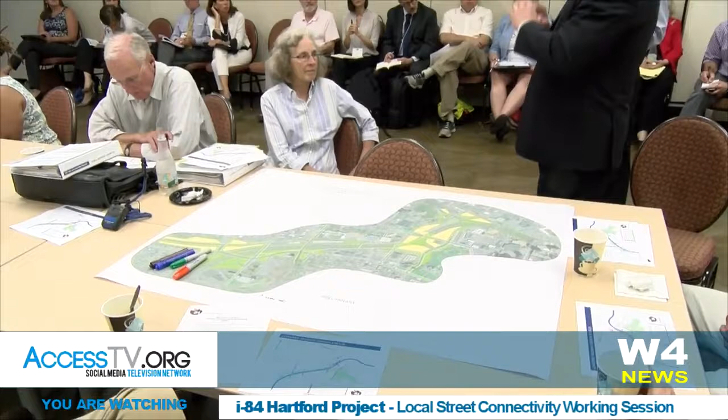This proposal solves a lot of problems in this region, and all of these ideas being developed—I love the concept of moving the railroad station. I love a lot of the decisions going on here, and I'm completely supportive of that.

But as we project out 100 years, and deal with the issues of the city of Hartford specifically—we cannot be in a position, as government, where we have to shut down the city for two years. A city that's currently struggling, in spite of what will be the best efforts on the department's part and everyone's part to coordinate it—there's just no way, in that small area of compression, that the vision we have can go forward without great expense to the city.

So the concept became: what can we do that deals with the I-84 and 91 corridor issue, providing a turnkey operation where we can continue to make sure the viaduct is safe and sound, and continue with the excellent planning for what this might look like, but envision tunnels from Flatbush Avenue to Robert Street, and from the landfill in Hartford down to the South Station in the Meadows, approximately.

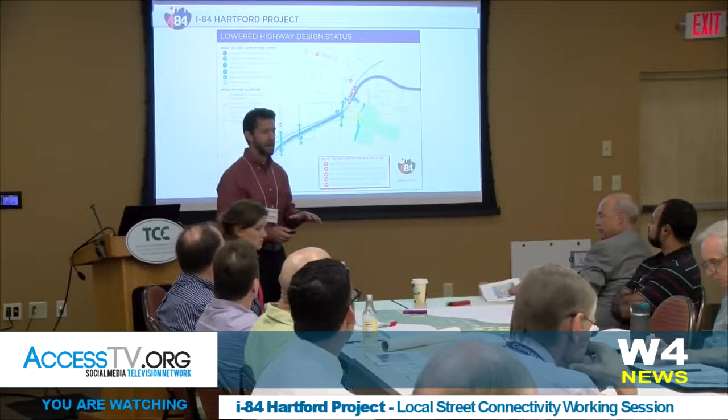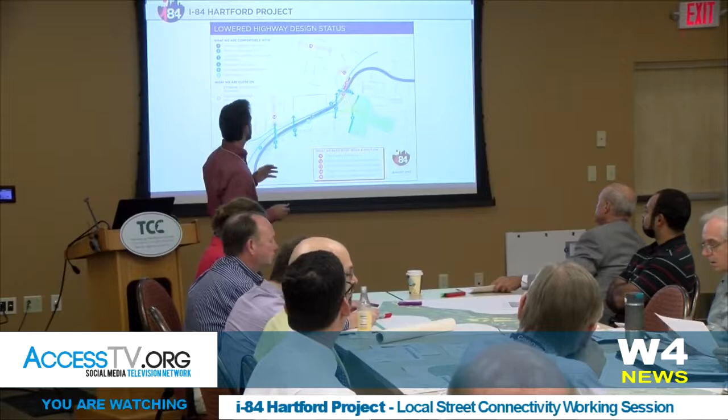So you all should have a handout that we created - thanks to Jamie at the city for recommending we do this. I think this puts a framework to the variety of issues we've uncovered. There are kind of three bins of issues, if you will, very simplified.

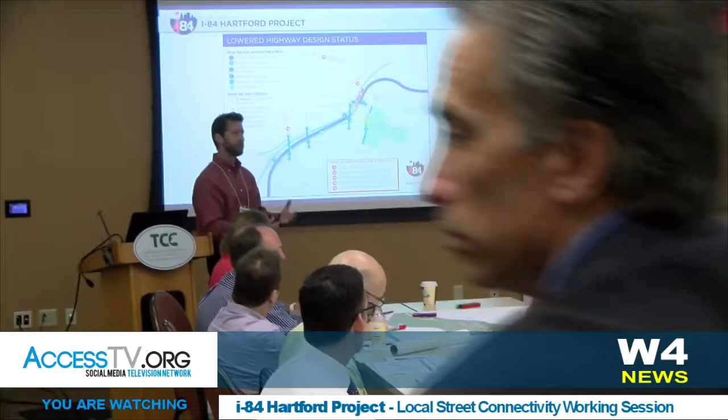There's the things we're really comfortable with, the result of many years of planning - things like we know a lowered highway for this particular project is the solution that performs best. We know the western side of the project, the interchange, we're pretty good with how that's configured and how it works. Local road overpasses, we know the rail relocation is a part of the project that's absolutely needed, and we're solid on that.

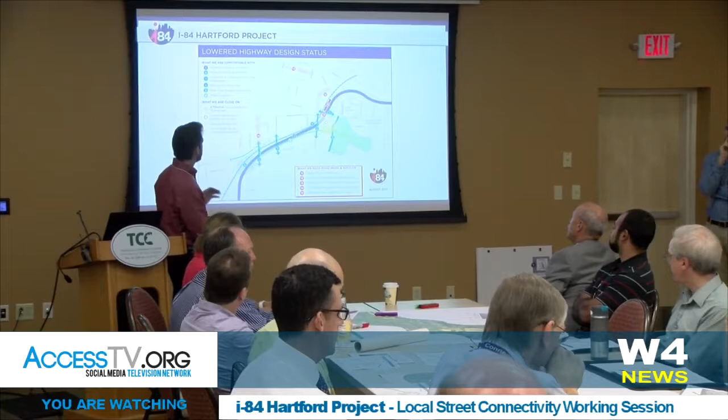There's also a bunch of things we're still working on but feel pretty close on. We know we have to reconfigure and bring CTfastrak into downtown, and we have some working routes for that. The eastern interchange area - we have a number of different concepts, and Casey will share those with you in just a moment.

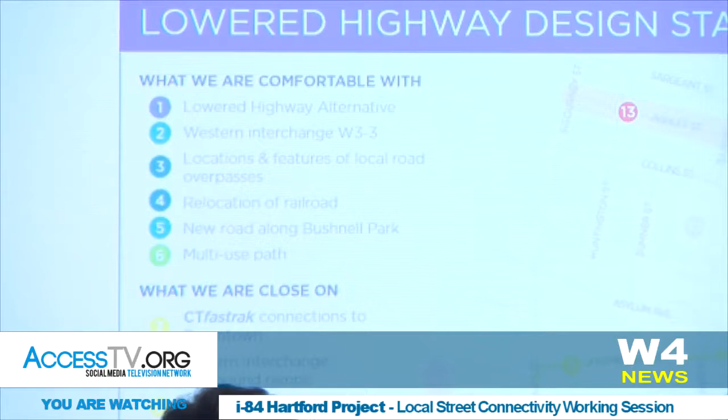We know a deck somewhere in the Asylum Broad area is strongly preferred - it allows for economic development opportunities. And we have pretty good working knowledge of how the local street system should work and operate to enhance walking, bikeability, and transit use. Then there's a whole bunch of things that we're really still stuck on.

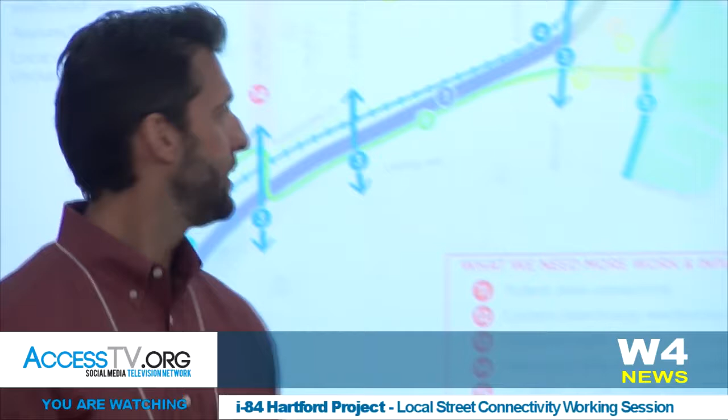These are things where a really strong idea has not emerged yet - things like how do we address the Trident area, or what are the impacts on Ashley Street, or where do the western ramps terminate? These are things still very much in flux, and we still require the assistance of you all in this room to help us think through them.

So again, we might not have touched on everything, but I think this is a simple way to illustrate where we are in the project.

So the first half hour, 45 minutes of this, we want to talk a little bit about the street system before we get into a discussion on the rail station. What we really want to know is what you're interested in hearing about, because we probably can't approach all these topics in one day. There's been a lot of concerns, and we've planned a bunch of new connections, reconfigured streets in downtown and throughout the Hartford area. Is that a primary concern? Did we cut something off that shouldn't have been? Should we add it? Did we add something in the wrong place? Did we move something? That's one theme we might touch on today.

Or are people interested in things like routing? When we take interchanges away, when we move ramps, there's going to be different travel patterns that have to be established. Is there concern over that? Is travel time a big issue? What about traffic? We know Laurel and Ashley Street, we've heard concerns about those. Do we want to spend time on that? How about the overpasses? Did we get them right? Most of them are in the same place they are today, just over the highway, not under. But in terms of how we're designing them with landscaping and bicycle and pedestrian amenities, you can speak to that.

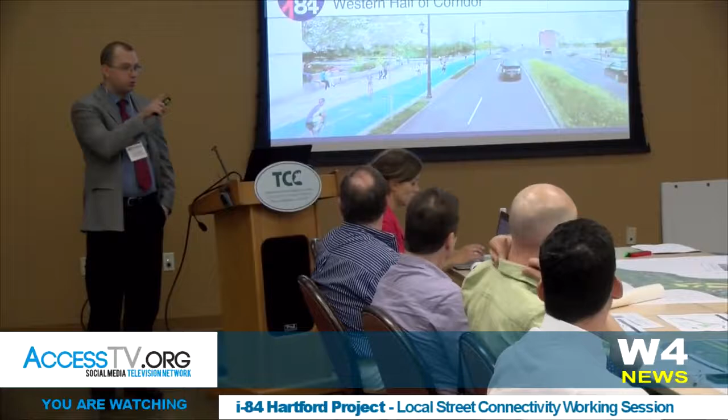Good afternoon everyone, thanks for coming. What I'm going to do is go through the proposed highway layout options that are on the maps in front of everyone at the table, and also on some slides here.

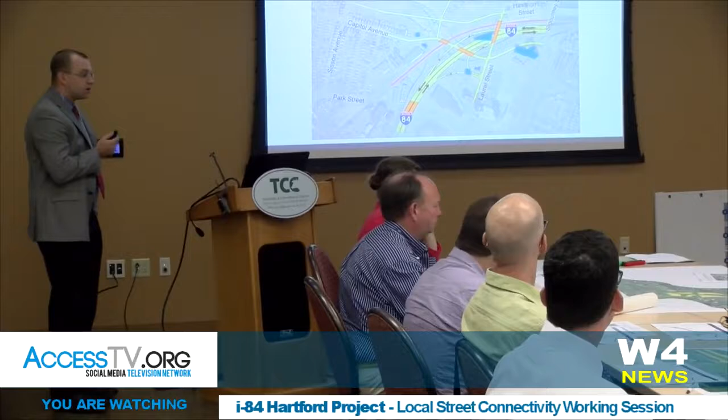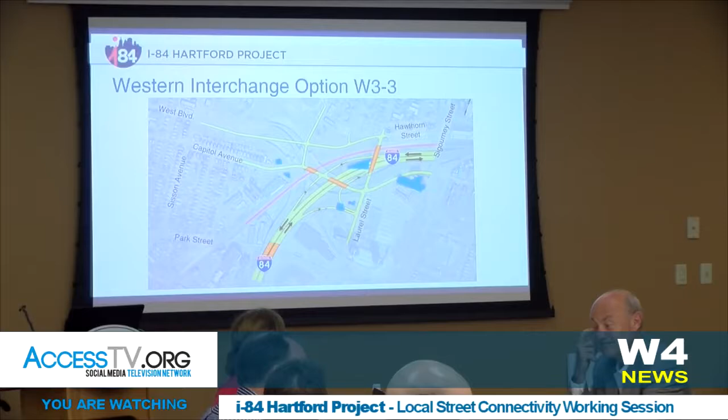Starting in the western half of the corridor, as illustrated on the maps at the table, that western part runs from about Park Street to about Sigourney Street. Proposed I-84 would come over Park Street like it does today. From there it would be lowered down to at or below grade, whereas today it's elevated above Laurel Street and Sigourney Street. It would descend as we go north, reaching about 10 to 15 feet below grade approaching Sigourney Street.

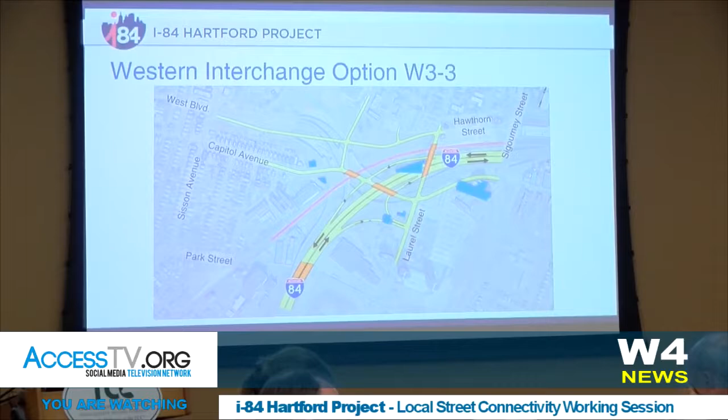In terms of off-ramps, we'd essentially be replacing the existing Sisson Avenue interchange. Today, off-ramps and on-ramps from both directions come all the way over to Sisson Avenue near the west end, taking up a lot of space, as you can see on the aerial with all these on and off ramps. We're trying to replace that with a more consolidated interchange that takes up a lot less real estate.

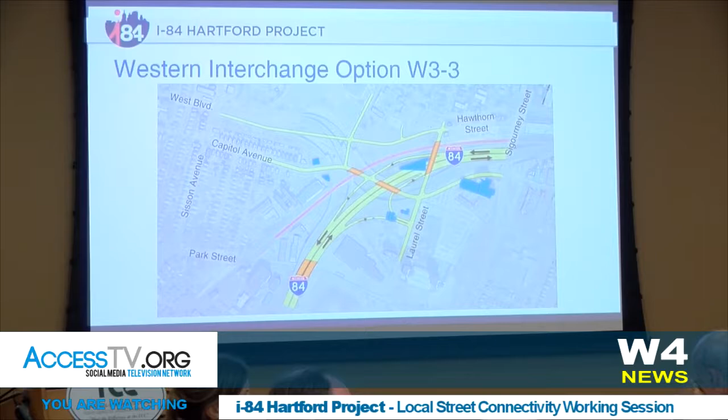So we propose eastbound off-ramps, plus an off-ramp and on-ramp to Laurel Street, just a bit south of the existing intersection with Capitol Avenue. The existing Capitol Avenue comes through here, and Capitol Avenue would be part of the lowered highway. Today Capitol descends beneath the railroad and beneath the highway; it would instead be raised up, climbing just before these two buildings.

On this map, these blue shaded buildings represent potential property impacts. Capitol Avenue would climb over the railroad and over the highway, providing a westbound off-ramp and on-ramp. One of the biggest benefits of consolidating the interchange as proposed would be freeing up this large area of land currently occupied by the freeway ramps.

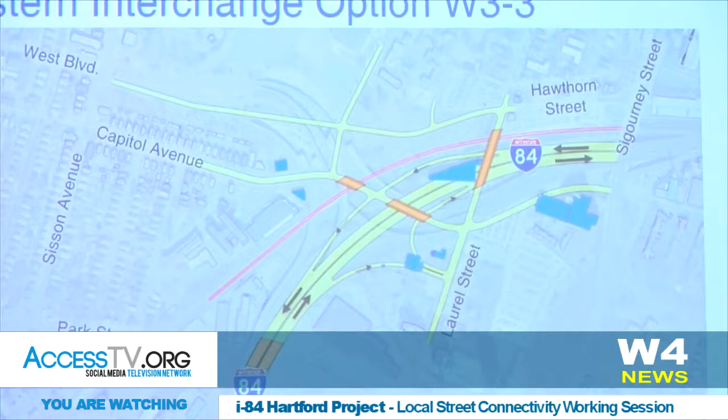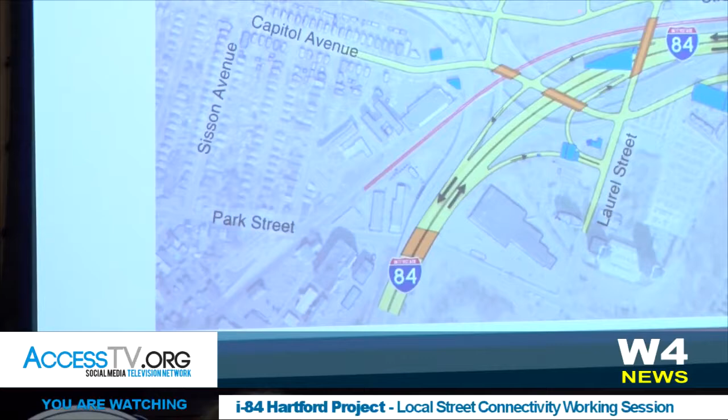In this proposal we recommend a new local street connection starting at West Boulevard at Sisson Avenue, where the current Sisson Avenue ramp is, extending east to connect into Hawthorn Street. This area is at a very preliminary design stage and remains flexible. We've heard some thoughts about the potential desirability of this parcel, which is city-owned, and there's flexibility in how the road could come through and how land could be retained for potential future development.

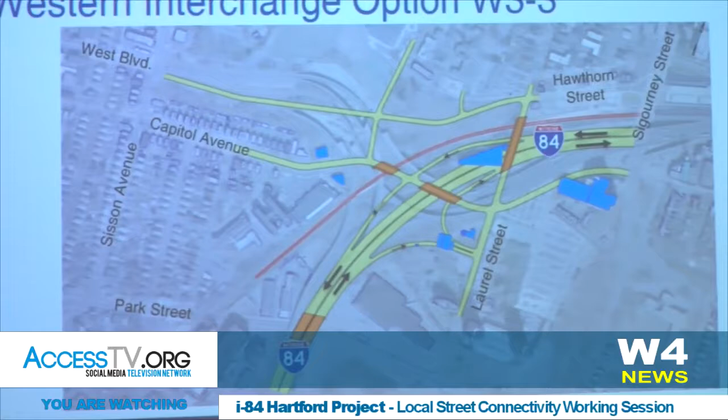With that, if there are any questions, we can pause on the western options here. I know a lot of you have materials in front of you, though some in the back don't have the maps directly in front of them. We also have a 3D digital model up on the monitor if you want to visualize it differently—Nick can manipulate it and go to any location you'd like, or we can move on.

Just a quick question to clarify: the orange segments, is that where the interstate goes underneath the street? Yeah, those are bridge structures—the orange represents bridge structures, while the yellow is at-grade roadway pavement.

And regarding Park Street, is there a reason it starts submerging the interstate after that point rather than before Park Street, to allow continuity along Park Street? Yeah, we looked at that in pretty good detail about a year and a half ago, and in order to get the freeway underneath Park Street back here, there would be quite a few technical challenges associated with that.

One of the challenges comes from the fact that the south branch of the Park River is right next to the freeway in that location, and we're starting to bring the highway down below the water table, which brought some engineering challenges. Not necessarily things we couldn't solve.

It also brings us closer in proximity to, down off the page, where we have the Flatbush Avenue ramps today, which wouldn't be impacted by this project at this point. So how that would all intertwine under a lower condition under Park Street.

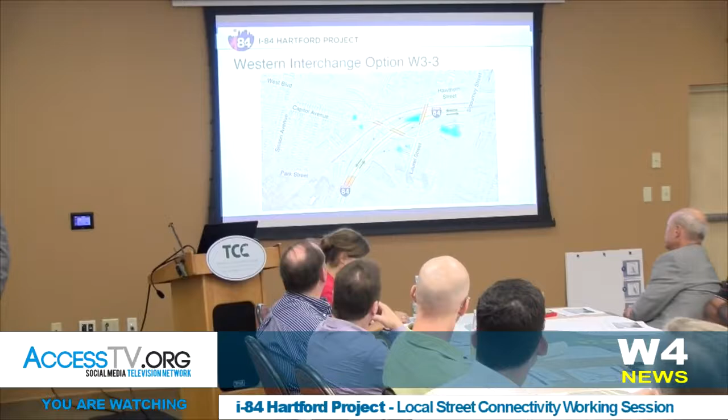The other thing we thought about was the presence of the railroad and CT Fastrak bridges over Park Street, which are there today. Under this project there would be no necessary change to them, and so those would still present that type of barrier regardless of whether the freeway were lowered.

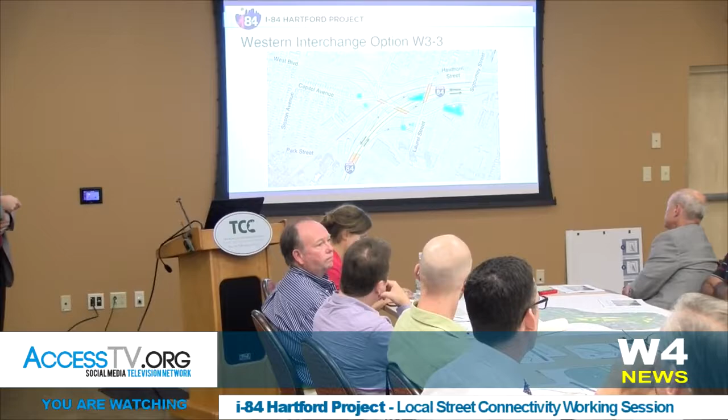Now we have looked at some potential ideas for how Park Street could be better connected underneath I-84. That could include having a bridge with the abutment set back, so there's a lot more space as you walk underneath, and some lighting that could be provided to make it a more attractive place as you move between the two sides of the freeway.

I think this is a pretty good solution on the west side here, and the liberating of 15 acres around the Sisson Avenue ramps is spectacular, and that's a wonderful thing. I think it makes a lot of sense to put a new through street between West Boulevard and Sigourney, extending Hawthorn and West Boulevard to connect.

What happens to the Hartford Courant building there? It looks like it's getting... No, the Hartford Courant building would be kind of over here.

So Broad Street would be over here on this map. You're looking at these ones? Yeah, what is that building? That's the DAS office tower, or it used to be the DAS office tower. So that's been vacated. Okay, I'm sorry.

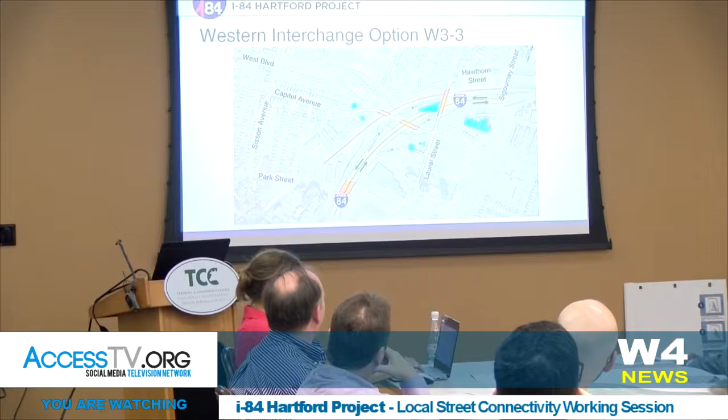Okay, good. So I'm going to move on to talk about, right now we've got three potential interchange configurations on the eastern side of the project. Each of these maps has one of the ones we feel is better performing, but all three of them are potentially still in play.

As noted on the handout that was provided, this is still an area where we think we're moving towards the right solution, but we know we're not there yet, and this is where we really value input. As Tony had brought up, this is where we start to look into the potential station.

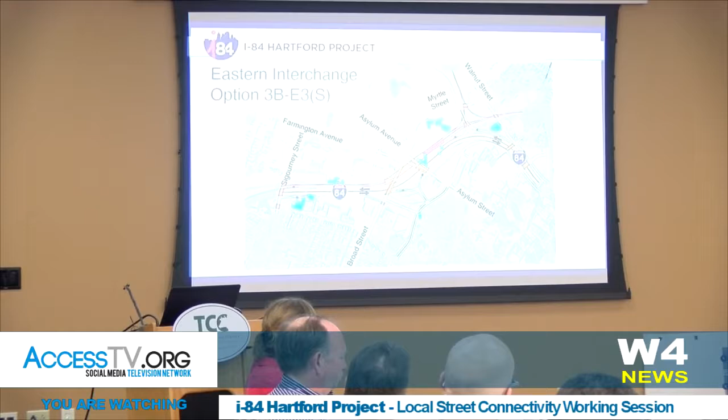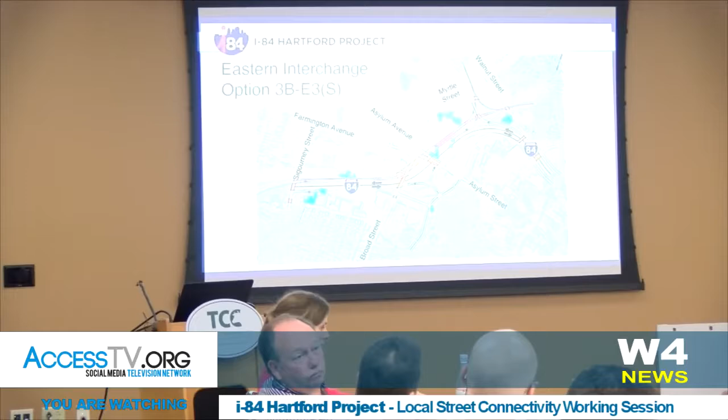The first thing I'll mention on these maps is the proposed railroad relocation. This is where that really comes into play, where it would start. So the existing rail corridor comes from off the page, snakes underneath the highway, crosses at this oblique angle, swings around to Union Station. Union Station's right here, comes underneath I-84 again, and continues off to the north. So again, that's the primary reason I-84 is elevated, these two crossings that exist today, here and up here.

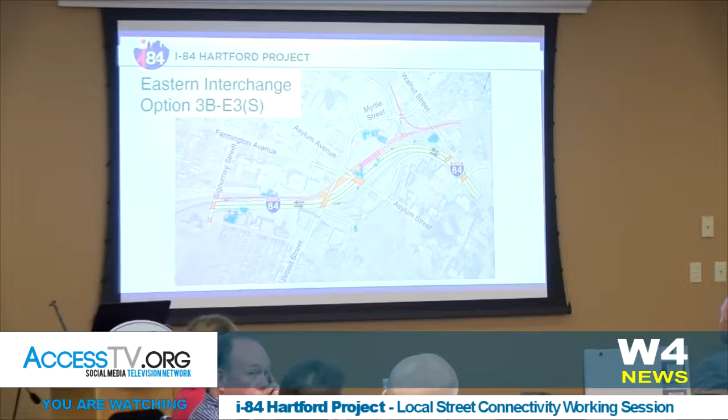So in order to lower the highway to or below grade, we need to move the railroad so it doesn't have to cross twice. These red lines, this red corridor here, represent that railroad relocation. It would go off its existing alignment, approximately here, where this large, recently constructed parking structure that Aetna has is located.

So we would come offline from about here, parallel the highway, come into a tunnel section beneath Broad Street, beneath Farmington, and beneath Asylum. You might be able to tell that it's widened out there, that's where we've first envisioned the potential platforms to access the train. We're going to talk a little bit more about that later.

And then the railroad would match into the proposed alignment here at Walnut Street, and then just before that Albany Main intersection. So once we're able to do that, the highway, which on the western option was lowered to or below grade, about 15 feet below ground where this parking lot is west of Sigourney Street, would be able to remain at or below grade, rising to about ground level through this area.

Today we have the Park River Conduit, a 40-foot by 20-foot concrete box culvert, basically where they buried the Park River as a flood control structure, which comes through this area and curls around like that. So we did speak with the Army Corps of Engineers about the feasibility of potentially relocating that.

It would be a significant challenge, and at this point our proposal would take the freeway and have that climb and sit above that conduit structure. Then, following this area, it would dive back down again to be kind of 10 to 15 feet below where natural ground level is beneath Broad and Asylum, and carry on to connect into that canyon section you have today that goes to about High Street.

In terms of on and off ramps, we would essentially retain the Sisson Street on and off ramps that exist today. In terms of eastbound ramps, we have an off ramp and an on ramp from a new road we proposed, which starts where the Capitol Avenue ramps come today. It would start down there and connect to Asylum Street. This would be located off to the west side of Bushnell Park.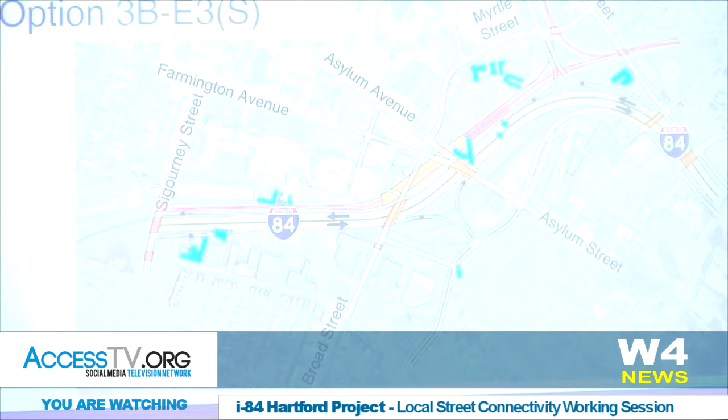So we'd have eastbound ramps come to this new road, and under this proposal we've got westbound ramps that would come to this sort of street extension from Myrtle Street into Edward Street. Now, this area of the project is where we're really still working with stakeholders to understand the right solution. So I'm going to page into the next concept, and you're really going to start to see the difference if you keep your eyes in this top right part of the page.

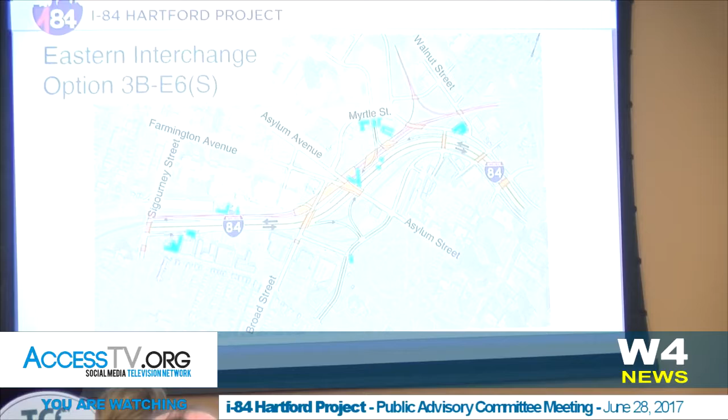Under this concept, which is the one that is on the maps in front of you, Cogswell Street would be realigned into Edward Street here, and on and off ramps in the westbound direction would come to that street. The third option on the table would bring the westbound on and off ramps to the existing Myrtle Street, which would require this potential street to be constructed near the Hartford campus.

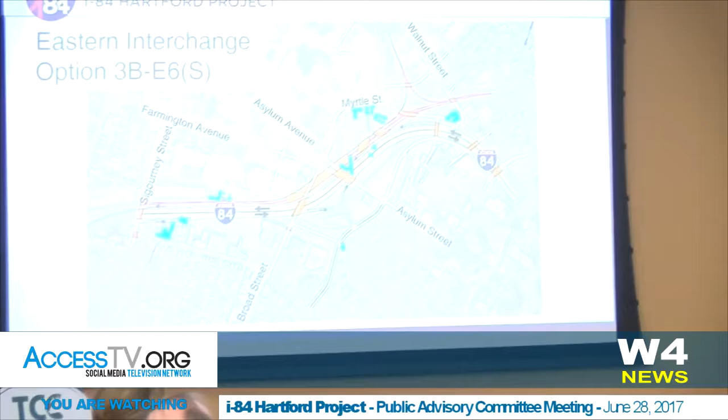So ultimately, we're still trying to weigh some of these different factors, and we don't think we necessarily hit a complete home run with everything yet, which is why we're here today, why we're talking to everyone, and want to understand some of the things you might like about some of these, some of the things you want us to keep working on. So with that, I'll open the floor. There are probably 15 things about this that I could have explained, but in the interest of time, I'd be happy to answer any further questions.

Well, it seems to me, I live on Asylum Street, that the third solution, this solution on the board, seems the most viable, in that the on and off ramp is directed toward Collins Street.

Yeah, so I would want to say one thing about that, is that we are continuing to explore ways to kind of generate that type of movement with this concept. So I see what you're saying - the road is aligned right with Ashley Street, which would direct potentially traffic down there. So we are continuing to investigate ways to almost create an S-type movement there, where the through road would direct you to Collins, because we do understand that Collins Street is the primary vehicular way to St. Francis Hospital, and has been for decades.

Well, the way it is right now, you have in and out from Broad Street and Asylum Avenue and Capitol Avenue, which are major roads. So even though there's traffic, they disperse and collect in a certain manner. There is a traffic problem at the triangle on Broad Street currently, but with the new highway, I think it is important to bring the traffic or draw the traffic from major streets and not local streets.

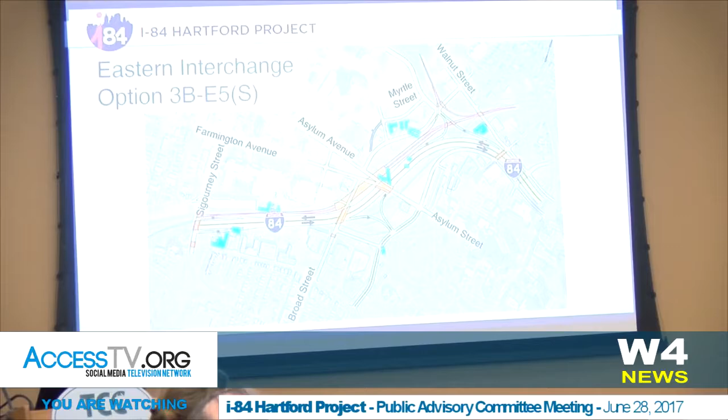Okay, yeah, that's right. Can you explain why the Cogswell Street nubbin has been removed in all of these? Sure, and I would just say on that, we have highlighted on this handout the Trident - the Farmington, Asylum, Cogswell, Broad Trident - is very much an area that we're still working towards a solution. So what's illustrated in these concepts that Tony's referring to is the removal of this segment of street, which I think is technically Broad Street, between Asylum Avenue and Farmington Avenue.

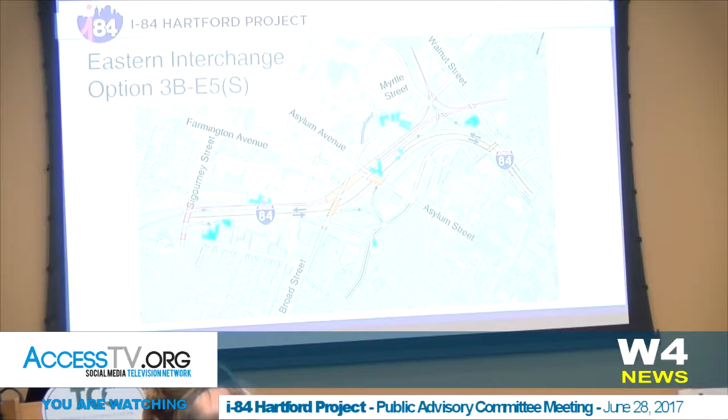Now, as many of you probably know, the Trident gets very congested, particularly in the PM peak period. One of the primary reasons for that in the PM is you've got a kind of conflicting set of traffic movements.

You have a large percentage of traffic going east-west, either up Asylum or Farmington, and then you have a lot of people coming down from these employer parking lots to get on the freeway at Broad Street. So the conflict there, and the very short nature of that little segment, really affects the operations of those two traffic signals, and they kind of bleed into each other, which causes the negativity in operations you see today.

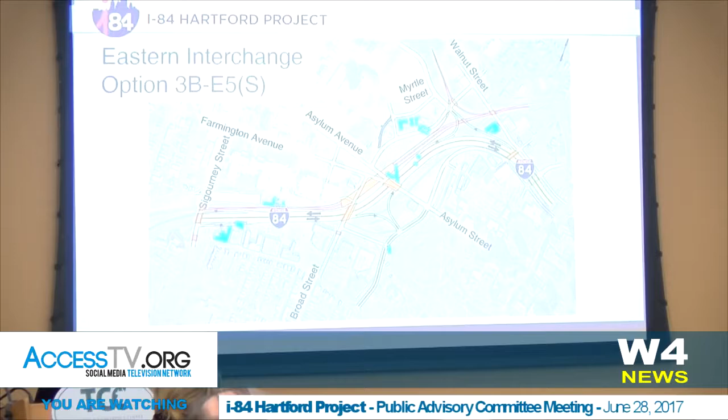We have tried many different scenarios, and I think we'd be happy at a future date to really sit down and dedicate a whole presentation to that. But ultimately what we found with this solution, which we developed in the spring of this year, was...

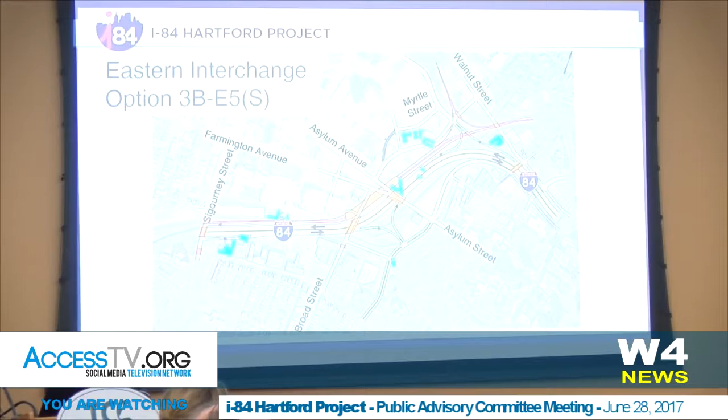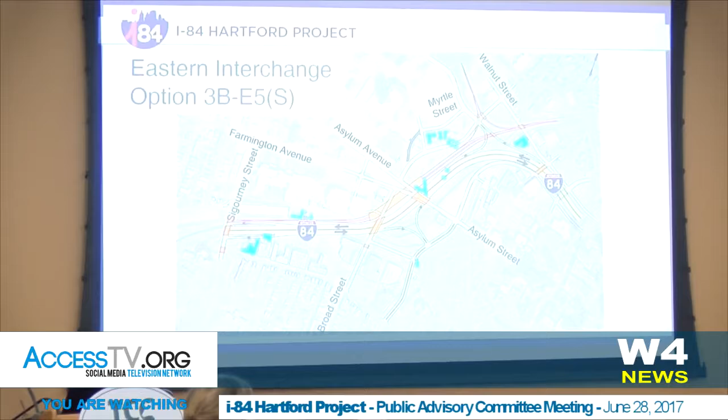that traffic that today comes down to get on the eastbound on-ramp, no matter what, whether this street was there or not, would likely come down to get on the on-ramp now that it's been relocated from Broad Street to this new road adjacent to Bushnell Park. So that did eliminate that big crossing movement.

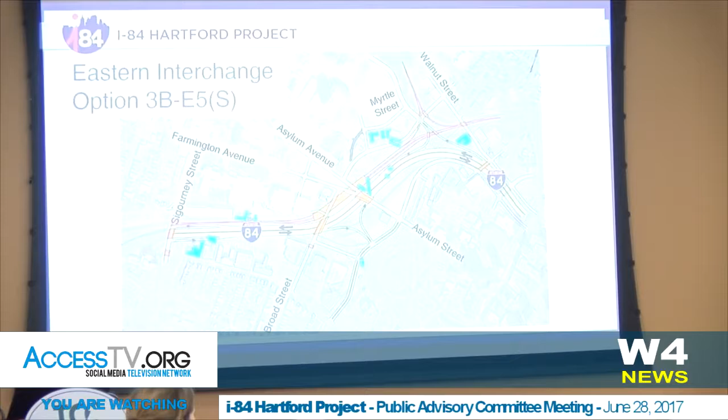And what we found was if we just took that segment of street out, just for analysis purposes, it enabled the traffic operations to be significantly better. I know the takeaway is we're only talking about traffic, but traffic operations will be better with much narrower streets. We'd really be able to reduce the cross sections of these roads, which would make them significantly better both for bicyclists and pedestrians. Now we understand it's removing a connection, and we're here to talk about that and understand exactly how that spins back on all the users of the facility.

Could you come up with a list of possible ways to prioritize this discussion? Yeah, we have a whole set of slides. Tim, do you want to walk through some of the slides on the tray?

Just a quick comment while you're getting the slides up: when we talk about losing a connection in a city where 21% of residents almost never have access to a car, you don't have to lose a lot of that connection. It still can be a pass-through for anybody on foot or on bike. And it's right next to what would be your multimodal transit hub, which is where that concentration of non-car-based users would already be. Right, and so that's a very good point, that that connection would still be available for non-motorized modes of transportation.

So, I don't know, we're not settled on any particular option for the trident yet. As Casey mentioned, we've looked at maybe close to a dozen different scenarios. And this one seemed to be a compromise because it disconnects that thoroughfare at Broad. It's the smallest impact. All the other alternatives appear to either have a fatal flaw, they simply won't work, or the intersection gets really big.

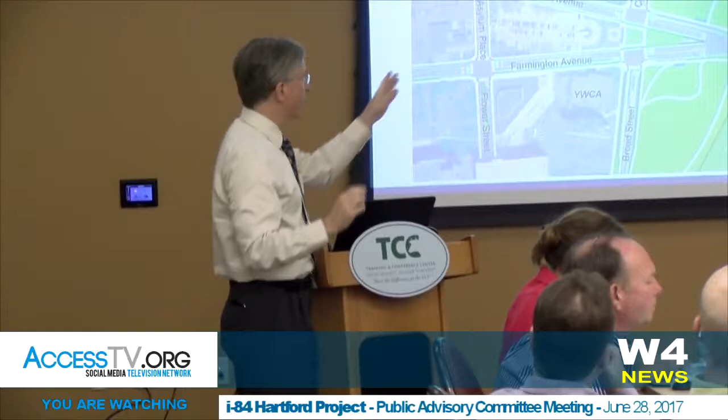Our hunch is you're very sensitive about the size of the intersection and bicycle and pedestrian comfort. But it could be, if this were deemed a great solution or a superior solution, there is that disconnect from the motor vehicle point of view. So right here, right? But this could be for pedestrians, bicyclists, open space. But it has a little bit of a circuitous route to get around.

Yes, sir, I'm sorry, I came in late. Tentatively for now, are you planning on maintaining the on-ramp at Broad Street for 84? No, that's going out. Then what you're saying does make a lot more sense — it changes the dynamics of the traffic flow in that area.

So I don't want to interrupt whoever wants to lead this conversation in terms of the options. We can flip through them very quickly and maybe move on to the next.

Yeah, go ahead, Jim. As you know from the neighborhood, the connectivity is very important. And if you look at a big map, the direct route to get north-south is way down until Sigourney Street. And right now it doesn't even go all the way across. But it's an important connection north-south as far as livability, especially since you've taken out Flower Street.

Understood. Maybe we can focus on what the next best solution would look like. What is that? Maybe we can show that.

One of the things we looked at is really during the peak traffic hours. As Casey said, there's delay going through these intersections, too many in a short distance. So what we tried to do is eliminate some of the conflicts.

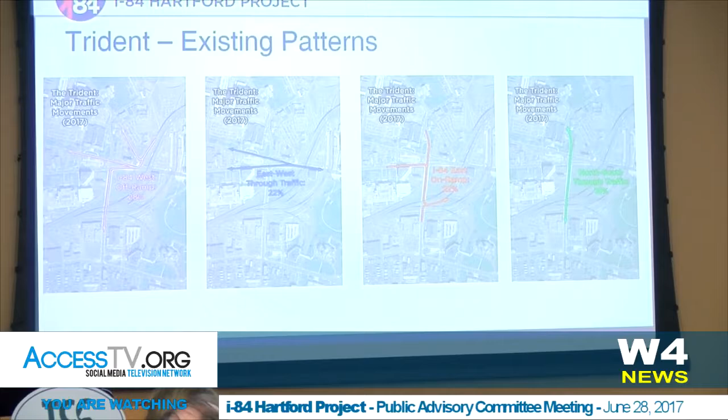We looked at traffic patterns, where it's coming from and where it's going, and found the majority of traffic is really doing that split between Farmington and Asylum. It's not taking a lot of the turns going down Broad and up to Cogswell, especially if the ramp isn't there. This is existing, and you can see here the on-ramp. So there's some traffic that does that, but if that on-ramp isn't there, you remove that north-south movement.

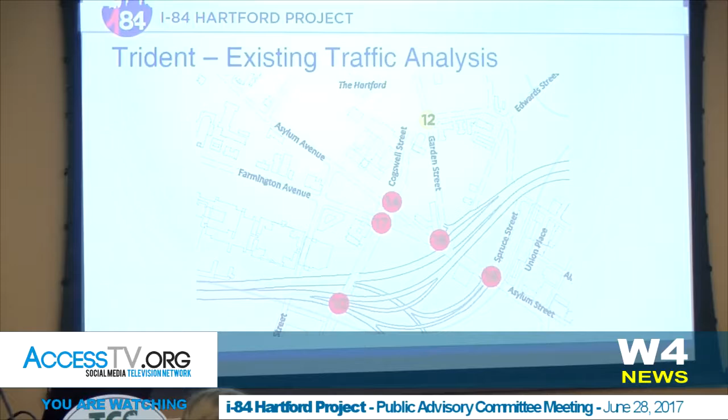This is existing traffic operations. You can see a lot of red here, again because of a lot of delay, and the delay backs up into an adjacent intersection, which causes even more delay. More of the traffic patterns here, and the thickness of these lines represents the amount of volume going through the intersection - the thicker the line, the more predominant the movement.

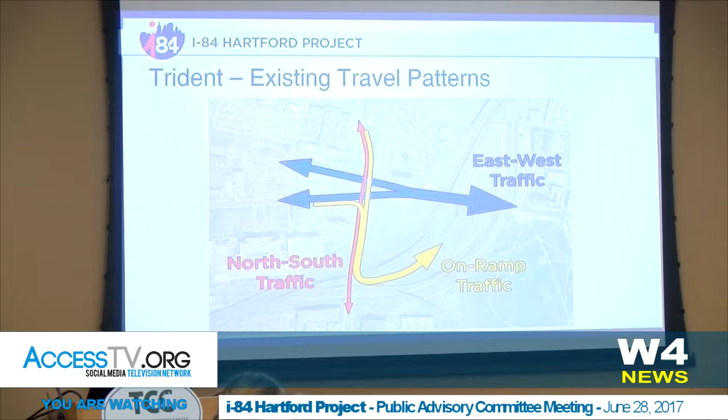What are the hours for this problem? This is again during the peak hours. What are the peak hours? The peak hour in the morning is from 7 to 9, and then from 3 to 6, or 4 to 6. So during the peak work hours it would be a totally different scenario off those times, but what we've been looking at is during those peak times.

I go through that intersection all the time, and the bigger delay is waiting for the pedestrians to cross at the Hartford on Cogswell Street. That's where the backup is, no offense Hank, where the guard stops traffic. I went through it last night at 4:30, not a problem - well, waited one light.

What's important is what the traffic flow conditions will be with our proposed project, not so much what they're like today. Wouldn't it be better without the Broad Street ramp? Yeah, should be better. The crossing is not in that section though - the crossing's all the way up near our visitors entrance. Right, but then the next intersection is fine. I don't have any trouble getting through that intersection, but anyhow.

Just a procedural thing - I know the city has consultants, are we going to be hearing what they're coming up with too? Yeah, today I think in a couple minutes we're going to transition to the station design. No, but I mean what the consultants that the city has - yeah, I think they've got some ideas as well, I'll be real quick on this. No, I was just curious.

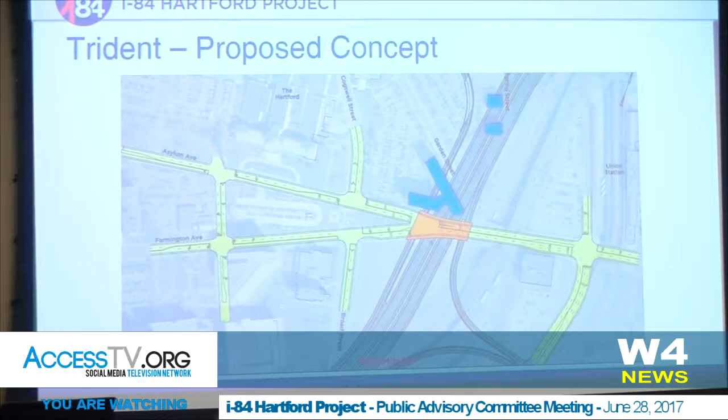This is a solution that worked well traffic-wise, and it also works great bike-ped-wise. If we kept the same configuration that's out there today, with all the same movements, it's a very, very big intersection and there's no room for bikes. If we were to widen it, we'd be talking about property impacts north and south, and also east and west. Right now it's maximized by vehicle lanes, and those lanes are very small, 9 to 10 feet wide. We typically like to see 10 to 12 feet wide for lanes, so they've already been maximized as far as how much you can fit in there.

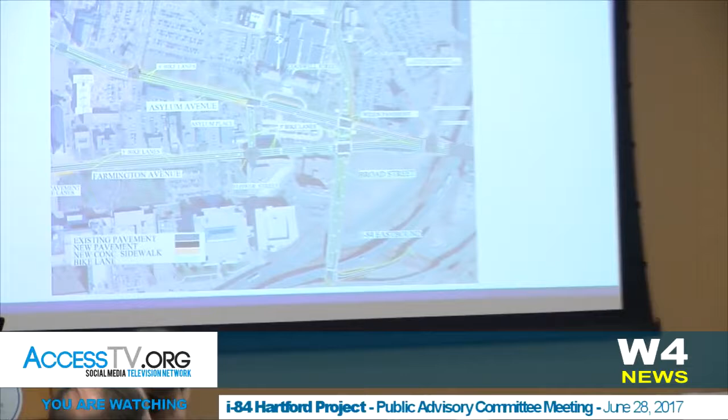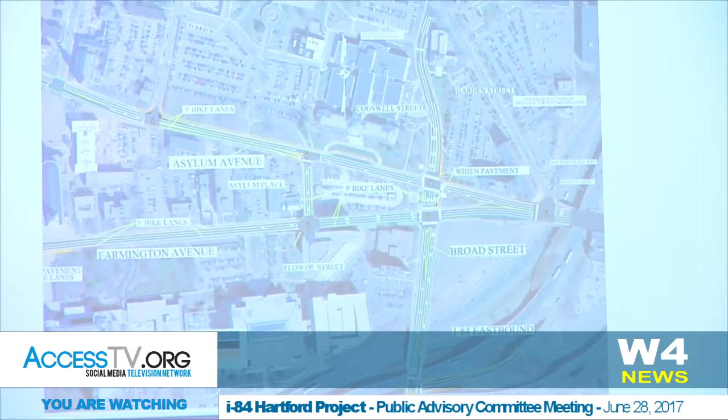So these are different solutions - people have looked at the Trident for years and years trying to find a solution. This one assumes that the Broad Street on-ramp would still be in the same location as an existing DOT solution. It's basically like a one-way couplet, where Asylum Street would be one-way westbound and Farmington would be one-way eastbound.

This is from the Hartford's consultant when they had recommended a roundabout, and we did look at a roundabout here. The issue is if there's just too much volume for a single-lane roundabout, there are queues that would queue up on each approach. There's just not enough capacity. Roundabouts work very well, but they do have some challenges, especially with bikes and pedestrians going through there.

How about a 2-lane roundabout? We did look at that as well. I don't know if Nick, you want to say something. Sure, I can quickly talk about it, but Tony, I was hoping to talk with you and Bill McCarskey afterward. I have some more detailed information that would help us hash out ideas. I have some for you too.

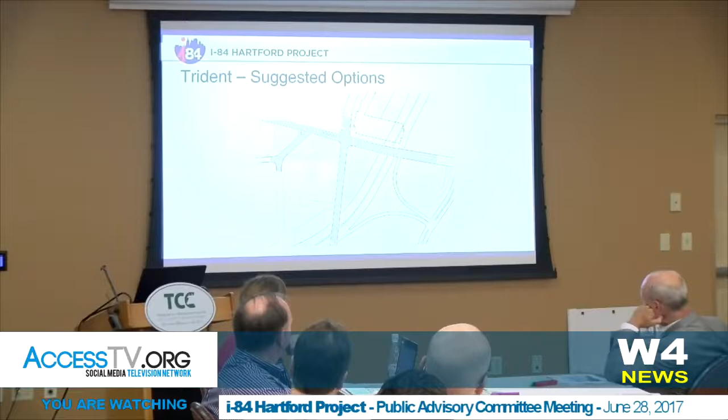The roundabout subcommittee had some other ideas of splitting up the east-west movements, taking Farmington and coming down to this new road here, Bushnell Park West. What do we think about that, or do we not have a conclusion? I think what we saw is there's no critical flaws traffic-wise, so it's still something that can be considered.

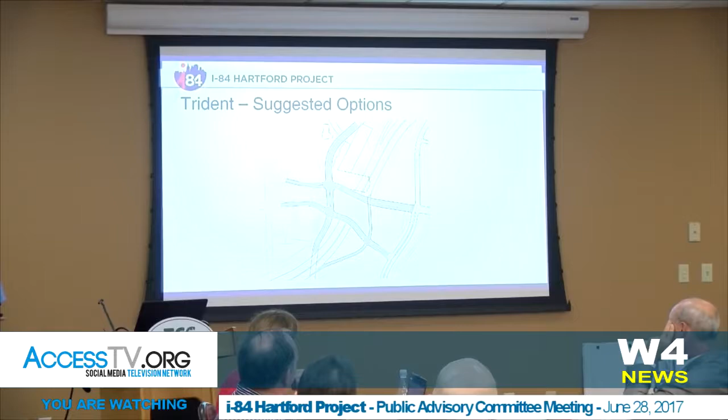Could you name the streets? That's a little confusing. So this right here is Asylum. Here is the existing highway. Here is the train station, Spruce Street right here. And then this would be Asylum coming up right here and rerouted a little bit. Here is the Hartford's campus, here's the YWCA. So this would come through, moving these ramps instead of coming out Bushnell Park West. This new roadway would be coming here and then have ramps off of that.

Before you move to the next slide, can you talk about how something like this suggestion has more intersections, which could be problematic for expeditious vehicular traffic flow, but in terms of visual sight lines, you're not dealing with a wide asphalt plaza splitting out. Can you talk about crossing pedestrian-wise for something like this versus maintaining the Trident? We want to be as efficient as we can for pedestrians with the traffic operations. A lot of the traffic is equally split between the two forks of the Trident, so by separating them, now you're creating a lot of lefts and a lot of rights going through the intersection.

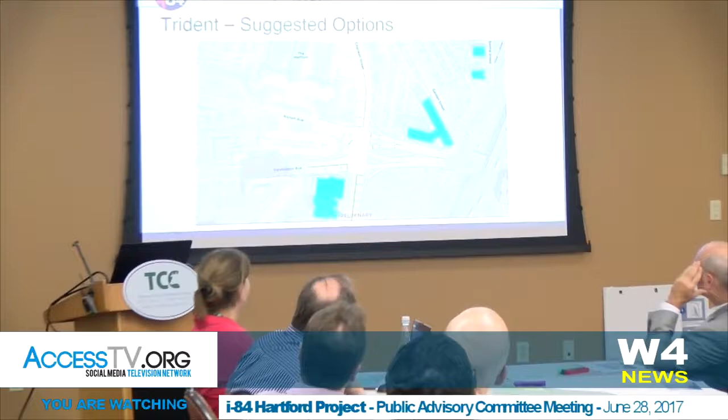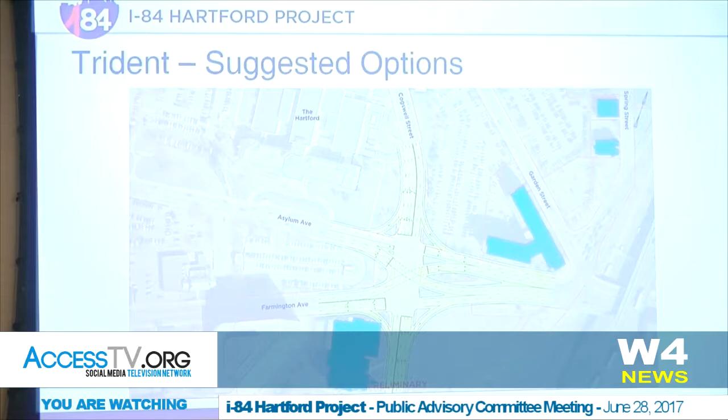So we looked at what if we could keep all the movements. If anyone's familiar with single point interchanges, this is kind of a modification of a single point interchange where we're trying to accommodate every single move, while still trying to make it as efficient as possible. You can see really what that does, it just blows the whole thing up. It's really not what we're looking for, but this was a way of trying to accommodate everything in one intersection. Not recommended, but still something that we looked at.

I think that's what, maybe that's it? So, to answer your question, this would be more of a pedestrian plaza type thing and not really for emergency vehicles.

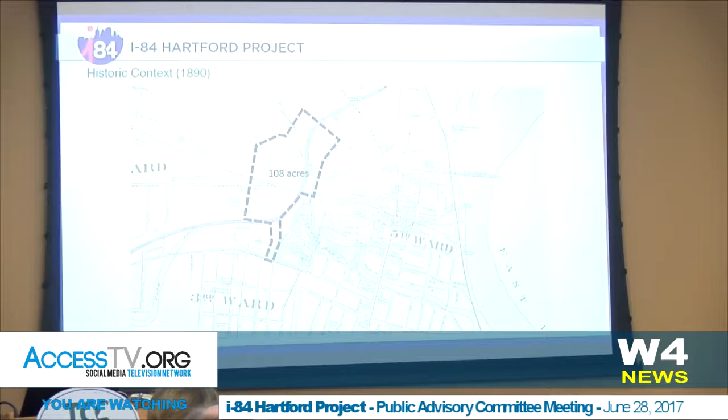Part of our mission and mandate is to think in that context, how can we make that happen? So we stepped back and thought about how Hartford was originally founded and settled, and how it originally grew. This is a map from 1890, and it's interesting because there were a lot of components already established over 100 years ago that really structured how Hartford has grown. You have the river, you have Bushnell Park, and you've got the rail station. The only road going through that area is the Asylum corridor.

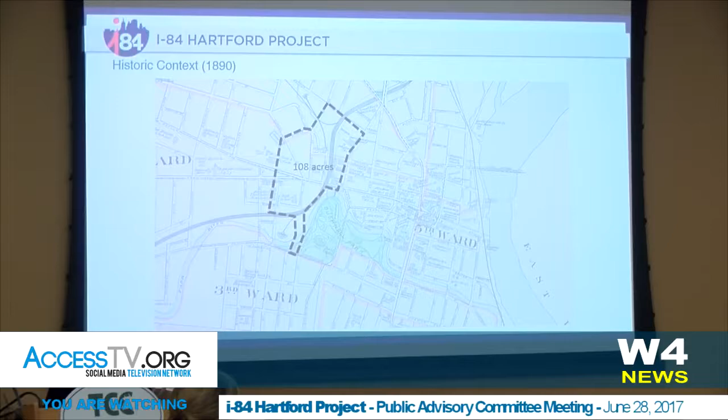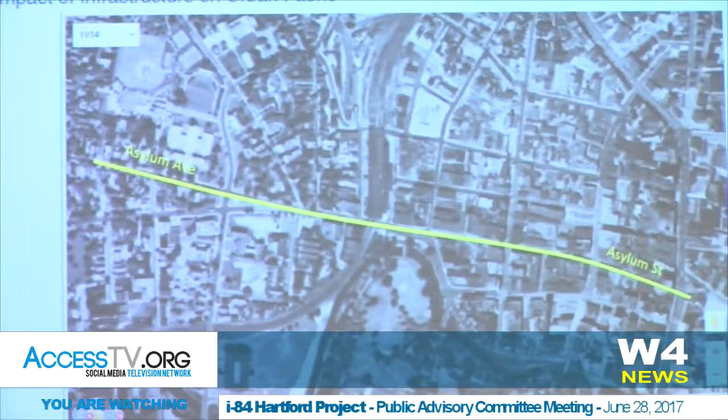But even so, through that time—and this is a picture from the 30s—there was a dense city fabric centered around that Asylum Avenue corridor, with the rail station right in the center, and a lot of great amenities. Over time, mostly because of behavioral patterns, we became a very auto-centric population here in Hartford and around the country.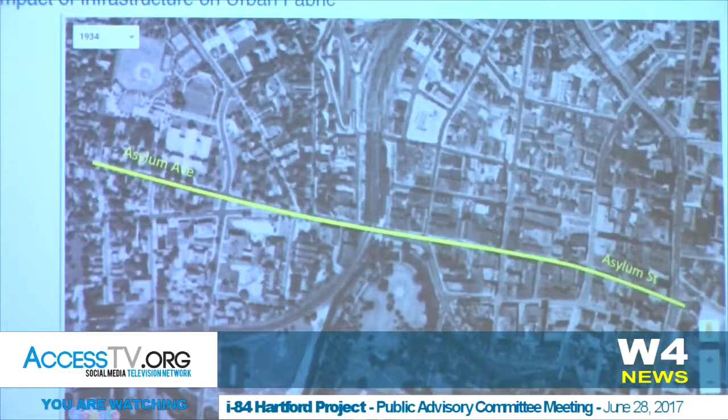And we started building highways, and obviously the highway that came through is in and of itself a physical barrier, something that cuts through the middle of the city. But you can also see how the fabric of the community has really dissipated into a lot of parking and auto-centric uses.

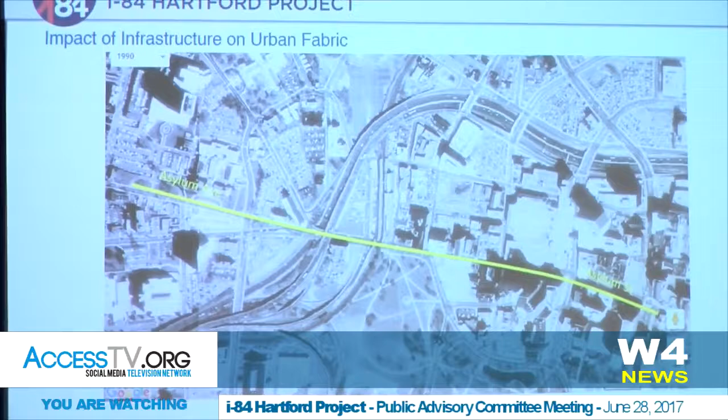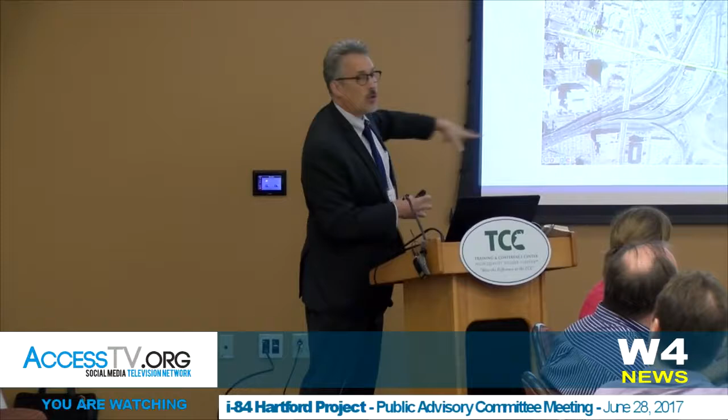So as we think about the highway and how we repurpose it, we want to think about how we also change the nature of the uses proximate to the highway, and how we rebuild that infrastructure that was there in the 30s, that dense urban fabric.

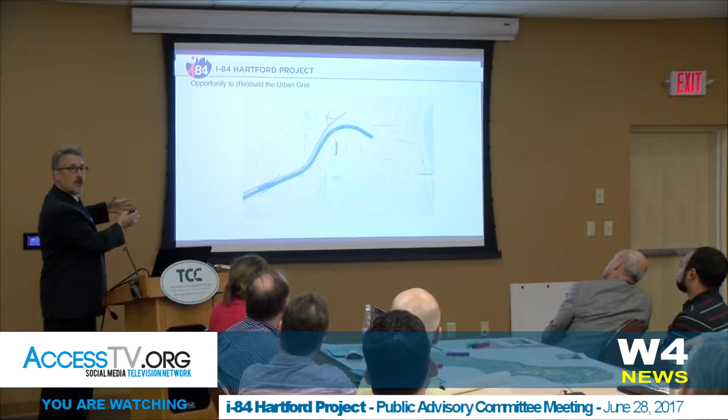In looking at that, we have this area where the highway sits and the rail sits, and they're pretty separated, creating a very large gap in the urban fabric. But now we're looking at a situation where those are shifted and pulled together. Does that give us a chance to begin to fill in that gap and build a new downtown or new section of the city that's really connected to these important pieces of infrastructure and this important new transit node?

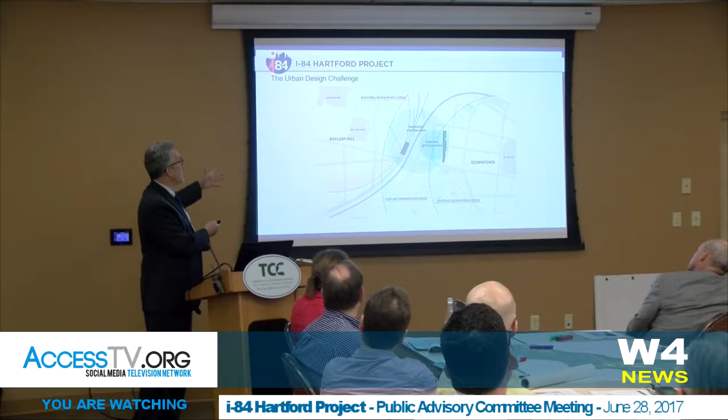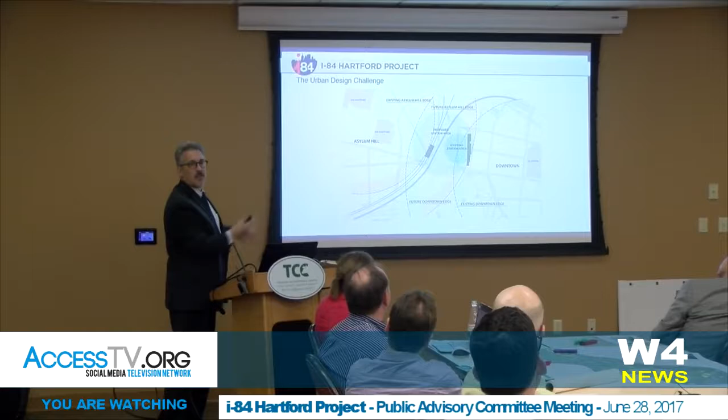It's as much about taking that existing downtown edge, which is very separate from the hillside edge, and extending the downtown, but also extending the hill and bringing the Asylum Hill edge down. That interstitial area in the middle is really this great new growth opportunity in downtown Hartford. So how can we capitalize on this great investment to create this great downtown that's the center of the city and allows it to grow on both sides, in the downtown and on the hill?

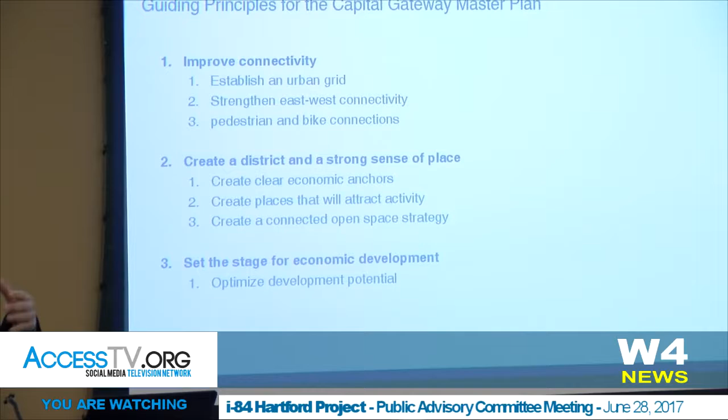So we started by thinking about some overarching goals for how to shape this strategy. It was mentioned today by the lady at the table: we want to improve connectivity. Between Asylum and Walnut and to the south, there is not much of a grid—there never has been. But can we establish a grid there so we can really create connectivity? And it's not just automobile connectivity, it's connectivity for pedestrians and bikes. So let's think about connectivity as a really important part of this.

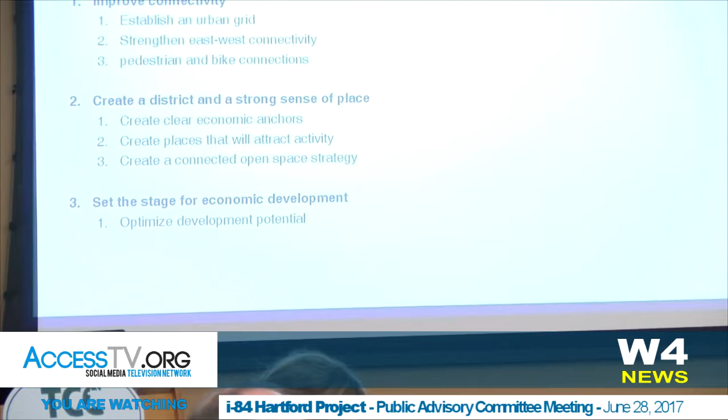And then the second is not just making the connectivity, but using that connectivity to create a strong sense of place. That's not just economic, but also open space strategies and activity centers—creating a lot of activities that can happen in that area to center this as a district around a big transit facility. That positions this part of Hartford for economic growth and opportunity, in a way that's possible for the city and within the guidelines of what the city is thinking in terms of growth in the area. So we want to take these principles and think about them as we're tackling all the very challenging aspects of designing these facilities through the middle of an already existing city.

So this is the street system, and what I was getting at is you always have the Asylum corridor, and then you've got these large stretches between Capitol and Walnut. There's not much movement east-west through this area, and really there's not direct movement north-south either. Is there a way to look at this network and create more east-west and north-south connectivity so you can begin to build an urban grid?

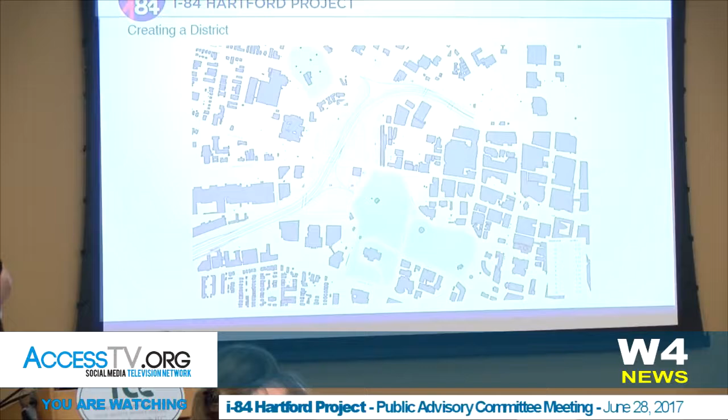The first thing you think about is where we can make some of these moves, and how these moves can connect with these major highway investments to create this kind of place in the center. This is just a figure ground, but it shows in more detail how little roadway infrastructure you have in this area, and that makes it hard to really build around that.

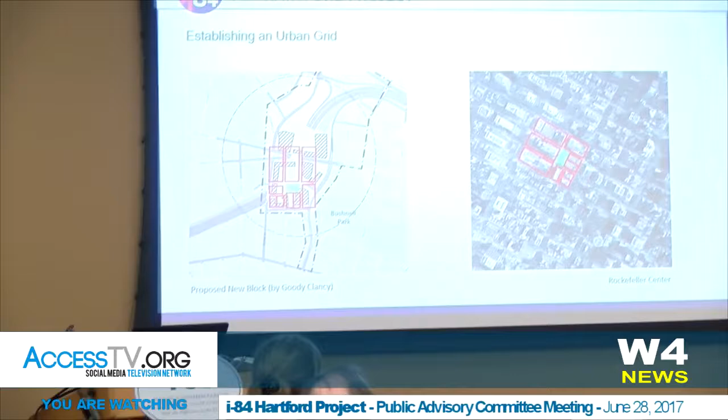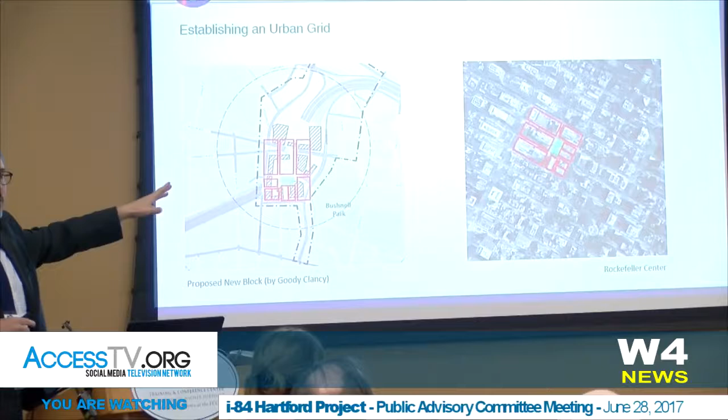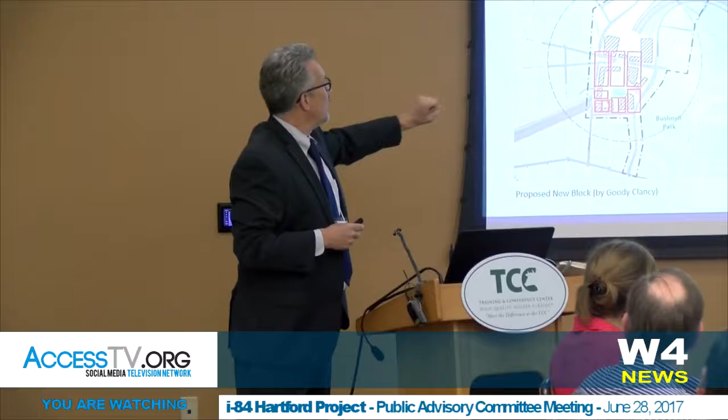The other thing to think about is not just the road system, but the spaces that are created as you think about the network. This is an example of Rockefeller Center, a very successful urban grid and large-scale development. I'm not saying Hartford should have a Rockefeller Center, but it's interesting to lay it over one of those two large spaces to get a sense of scale and the opportunities that could come from designing these locations both north and south of Asylum.

Tom? Yes? Would you go back to that? You could also just as easily take your Rockefeller Center and put it north of Asylum, could you not? Oh yeah, this was just, absolutely.

I think the reason for illustrating this is, as you think about the roadway system, you also want to think about the private realm, the spaces and buildings that will be built in that area. So it's the streets, the places for pedestrians and bikes, the types of development and private use spaces that could happen, and then the open space. The open space is the third critical part to this.

How do we make great visual connections through this area? How do we begin to expand the park-like connectivity of much of Hartford through this place? How do we also make the streets, as Casey and Tim were saying, of a nature that you can have bikes and pedestrians move on them, so you have a lot of open spaces through this area and it feels like a great downtown.

With that, I'm going to turn it over to David, because this network process sets up thinking about where do you place your station within this, and how does the station become this key node within the district you're creating. David wanted to talk through some great places we can look at from other parts of the country for emphasis.